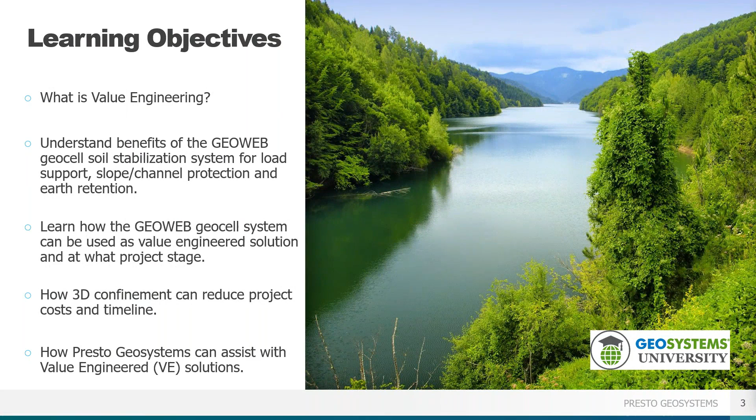A good starting point is defining value engineering. So there are many interpretations, basically commonly understood as the balance between function and cost. So trying to improve the value by either enhancing performance or reducing cost. However, it's often mistaken, especially as a manufacturer now, as cutting costs. So in reality, value engineering should focus on maximizing value along with quality, not just minimizing costs. So it involves exploring alternative materials and methods to achieve the design's intent without compromising performance. Since cost and functionality are directly related, reducing cost at the expense of performance ultimately lowers the value.

So all the project requirements must be clearly defined before proposing alternatives. So the objective is not just to meet that design intent at the lowest practical cost, but also including life cycle costs, maintenance, to improve its functionality and quality. So when can it take place? During any phase of the project. They all have pros and cons. The planning and design phase, that's probably the best part, as we all know, because addressing it right up front, you're going to have less cost. The change is lower, the impact on the schedule is minimal. However, most of the time on projects, value engineering typically occurs after the bidding phase, at the beginning, or actually even sometimes during construction.

Engineers perform their due diligence. They do all the planning, all the estimating, all the design phase, but especially what's happening around the world now, external factors often necessitate value engineering after the bid. Construction costs are rising almost daily, so it's common for the project cost estimates that the engineer made to come in much higher at the time of bidding. So this makes value engineering essential to keep the project within budget and moving forward.

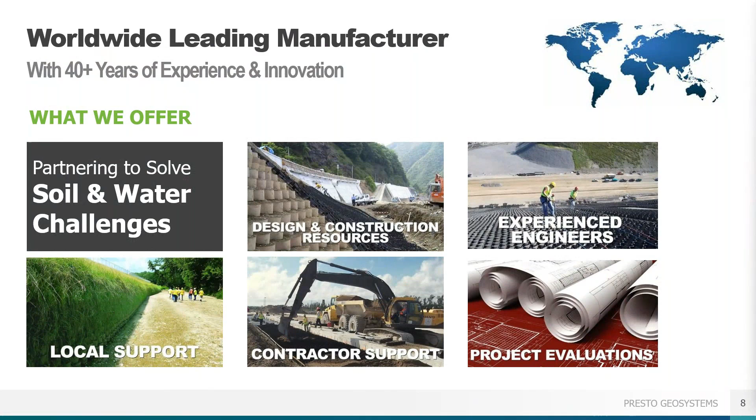So let's begin with just a little brief discussion on GEOWEB geocells. So at Presto we worked with the Army Corps of Engineers back in the late 70s to develop the technology. We really have been at the forefront ever since. We do provide more than just product. Like I just mentioned, we'll work with you from concept phase right through construction. So we have a great distribution network, and we operate in 4 different areas: load support, slope protection up to about 70 degrees. We can do channels, aggregate filled channels, vegetated channels, concrete filled channels. We also do reinforced slopes, gravity walls, and reinforced walls, MSE walls.

We also offer porous pavements, a vegetated geoblock, aggregate geopave. And also we have some construction mats called geoterra. But today we're going to basically focus on the 4 applications I showed here.

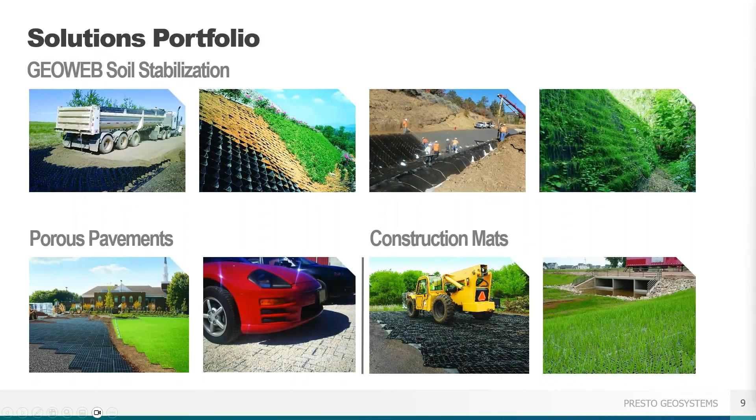So the system consists really of 2 main attributes. The first is the cell diameter, or the size of the cell. It comes in 3 different cell diameters: 8.5, 10.5, and 18 inches. So depending on the size, through that free evaluation, we'll make sure we have the correct size, and the cell depth comes in these different cell depths.

It also comes in different section lengths, more appropriately to fit if you have, say, a slope project that's only a certain length. We can match the most, basically limit the waste. And if it's larger projects, we can custom make panels to a specific length also.

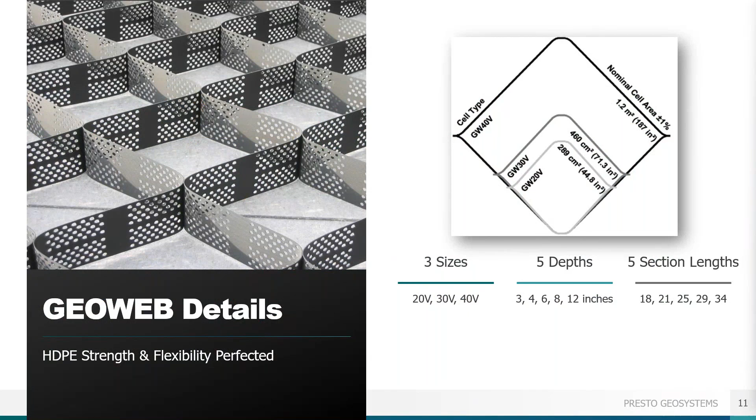The second attribute is a welded seam, where basically all the internal junctions are important. That's the most important function of a geocell. The stronger the seam strength, the better performance, period. So a strong seam will always make sure your lifetime performance is met.

We use 100% virgin high density polyethylene resin for consistent strong welds at the seams. You want to make sure you're staying away from any products that add cheap fillers or alloys, basically to lower the cost of the product but affects the seam strength.

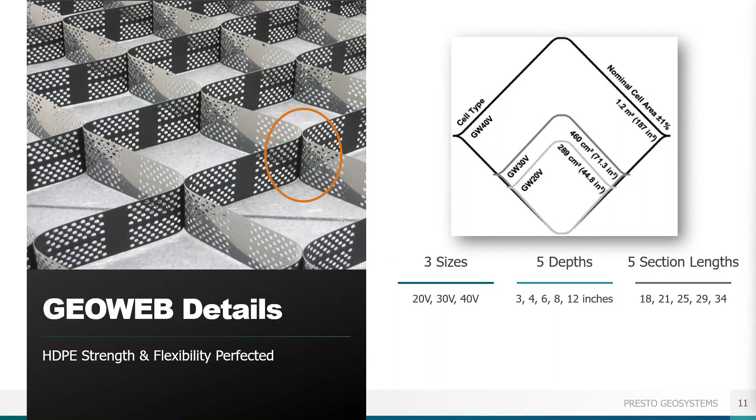The second characteristic is the infill material. There's basically 4 different types of infill. We can use coarse sand. We actually invented this GEOWEB technology for the Army Corps of Engineers. It's actually called sand grid. So the intent was to use it for beach sand that gives access to heavy military vehicles. So we can use coarse sand or anything that's a drainable sand.

We can do topsoil and vegetate it. We can do aggregate, and I'll show you some testing we did. And also we can fill it with concrete for channels, for applications, retaining walls in the front face.

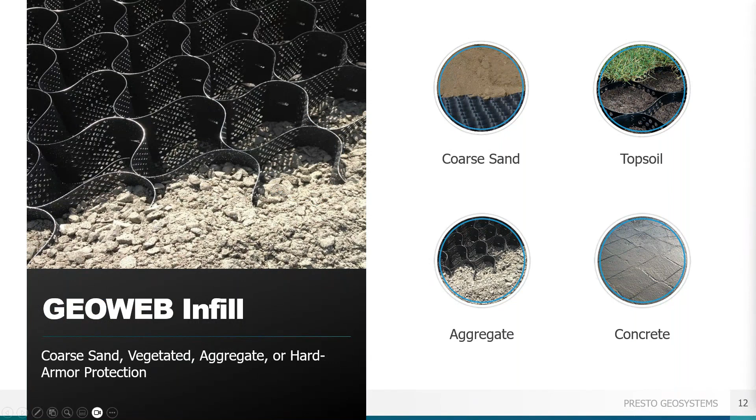Here you can just see a typical GEOWEB panel. It comes tri-folded on a pallet, each one a nominal about 8.5 foot width, and different section lengths. As I mentioned in the previous slide, we can do different section lengths or custom to meet your specific project. It ships about 100,000+ square feet on a truck, so it ships very efficiently.

All of our GEOWEB, all of our accessories are 100% made in the U.S. under very strict QA/QC processes. We comply with the requirements of BABA, the Build America, Buy America, Infrastructure Investment and Jobs Act. So if you have a project with that, we can provide the necessary documentation that shows that we meet all those requirements.

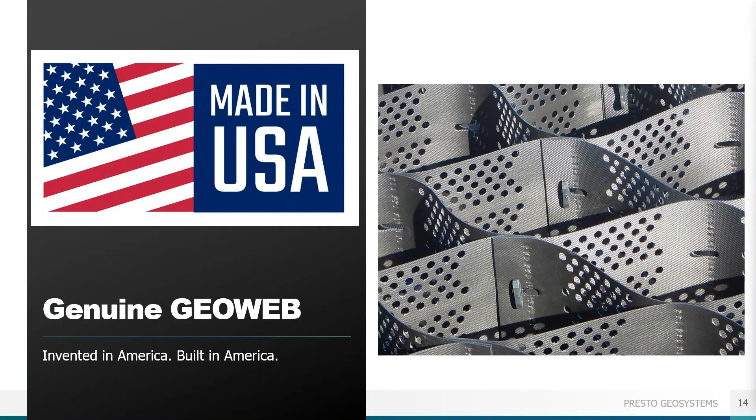So the system components, those are all the supporting components that really help protect the surface. You can see we have all different types of accessories, whether it's used for slope protection, where we have stakes, our actual wall keys for wall projects, tendon clips for slope protection. These are all designed specifically for use with GEOWEB. We don't use any other outside materials. All these are engineered specifically for use with GEOWEB.

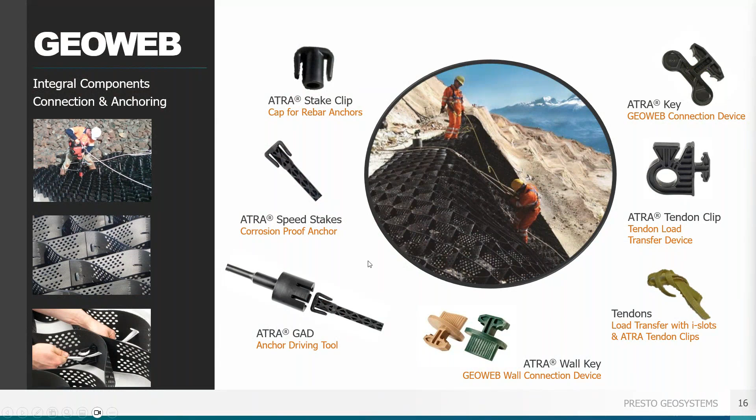Here you can see the ATRA key. This is probably the most important feature and accessory that we have. It's specifically designed to connect the panels side to side and end to end. You want to make sure that you're not getting any separation over time, which might happen with, say, zip ties or metal staples. We recently upgraded. We added these frictional barbs on the bottom of the key, basically to enhance the lockup a little bit. But you want to make sure that these panels do not separate when you're putting it in.

So that's what the ATRA key really provides, and it protects against the 3 primary modes of mechanical junction failure, which are shear, splitting, and peeling. And in our calculations, we check the factors of safety of those to make sure that there's no issues with any of those failure modes.

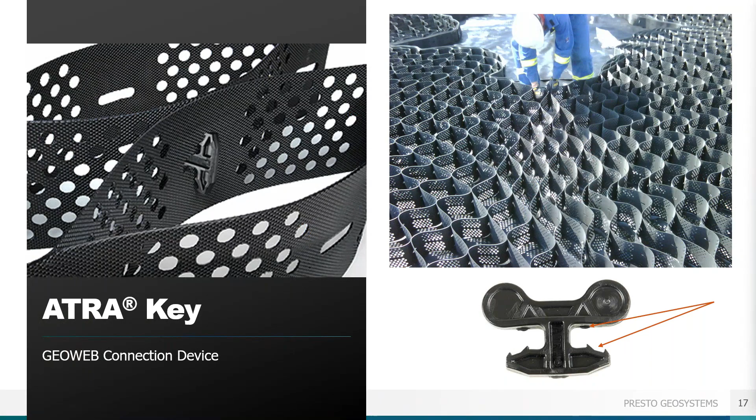So I'll talk about the 4 different applications now. The first one is load support for both paved and unpaved roads. This is a project we did. It was about a 1.5 mile road to an Entergy substation. This was an area south of Baton Rouge. A lot of rains, a lot of swamp areas.

The initial design included about a 16-inch cross section with a couple layers of grid and a subgrade low CBR value of 1. But when they went to put it in, the subgrade was just too weak, and with the heavy rains, the portion of the grid started to fail.

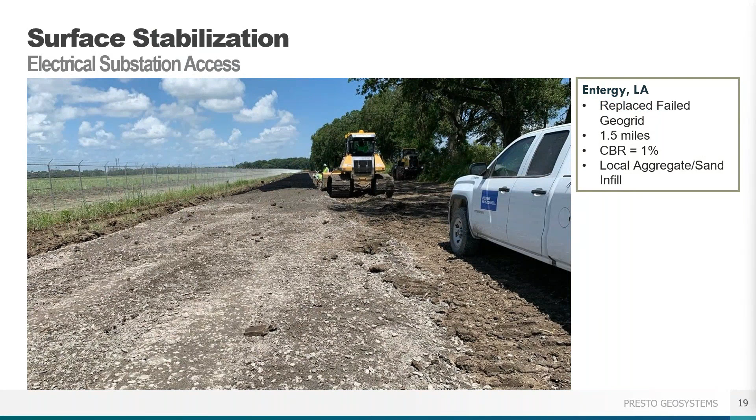So we do a lot of work with this engineer. They called us up, and we actually did a value engineered solution for them. So we worked with the engineer. We came up with a cross section consisting of an enhanced woven geotextile. These are geotextiles that can actually drain but keep the fines underneath.

This one right here had about 4,800 pounds per foot of reinforcement, so a very strong geotextile. Here we had a 6-inch GEOWEB. It was actually filled with the local available sandy crushed aggregate. So we don't need to have that high quality aggregate. We can use the sandy material. We're really going to save you costs and save you time.

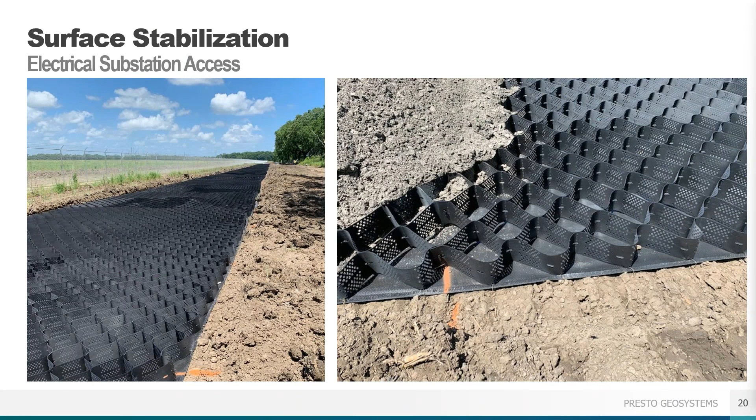This one, I think we reduced the aggregate by about 6,000 yards. You can imagine, cutting that cross section down to about 8 inches, or cutting it in half, really saving a significant amount of money, but also allowed them to build the road on time and on schedule. Here you can see the panels are very flexible. They can do inside or outside curves. You basically just under or over expand them.

You can see the final road construction. You can see the quality. It's not a very high quality aggregate at all. You can see the sand portions in that, but like I said, this has been in service for a couple of years now, and they've had really no issues on it. So that's the kind of application we do a lot for unpaved roads: low subgrade CBRs, 2, 3, less than 3, really bad soils. That's where we can really shine.

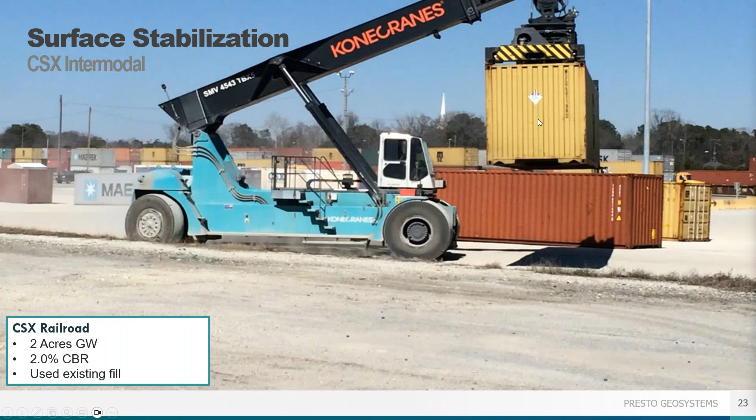This is an intermodal yard we did for CSX. It's out in South Carolina. You can see the picture. There's a heavy reach stacker, about 60 tons. It was severely rutting this area. You can see the rutting here, so you get a little better close up. It's basically the tire, but they had graders on this thing a lot. Every time they hauled one of the containers, they'd be rutting this. So it was really costing them time in maintenance, a lot of costs, a lot of slowdowns.

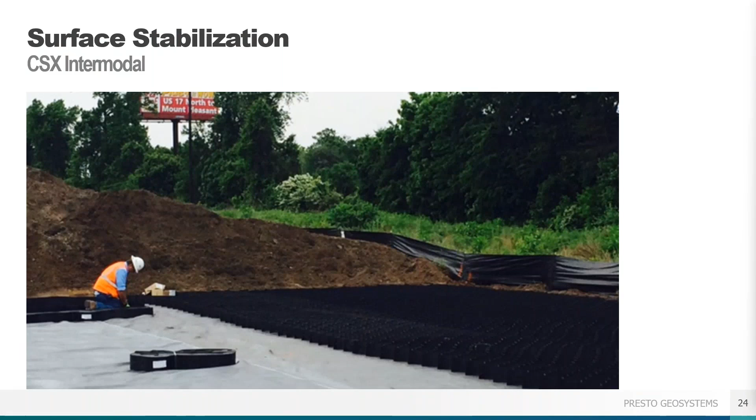They contacted us. We do a lot of work with them on the rail. So we worked with the engineer and the geotech on this one, and it was basically the same type of solution as that last project. We once again used an enhanced woven geotextile, a little stronger on this one. We still used the 6-inch GEOWEB. But the interesting part of this project is that during the review stage with the engineer and the geotech, it was determined that we could reuse the soil since the fines were less than about 10 to 11%. Usually if it's less than 15%, we can use it to fill the GEOWEB. So rule of thumb, if you have 15% fines or less, that's a really good infill for GEOWEB.

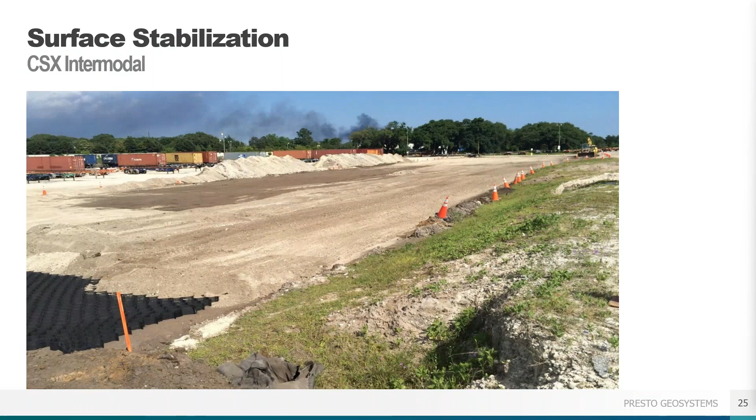So what we did is we just stockpiled it all on the site here, and we put it right back into the GEOWEB and used it as the infill material. Saved them over about 3,000 yards of hauling the bad stuff out and hauling the good stuff back in, plus the downtime, so it really saved them a significant amount of money. And you can see the final solution, a low-grade sandy aggregate. This has held up. They maintain it maybe once a month, if that. Sometimes after heavy rains, because there are fines here, they'll have to go in and grade it, but they don't have to do it daily like they were doing.

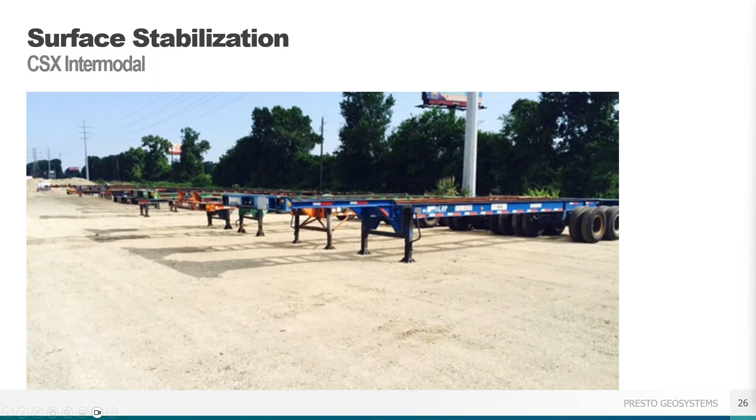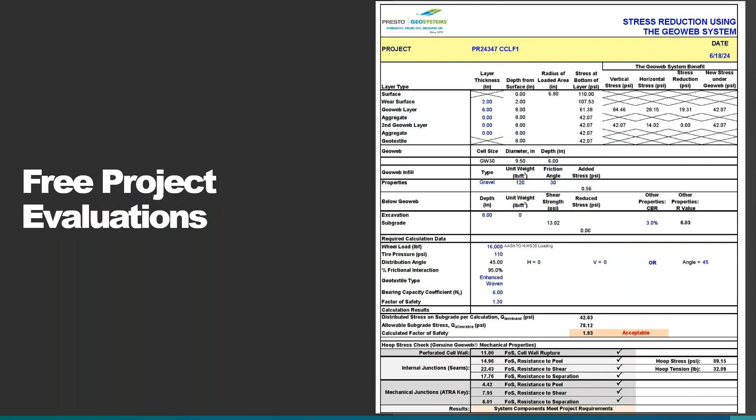For all of our projects, we'll give you calculations for unpaved roads. Like I said, we're going to give you a written summary, the calculations, cross sections, a plan view if necessary. It's free of charge, no matter what the size, we're still going to provide the same amount of support. It's based on tire pressures, it's based on the load, whether we're having geotextiles underneath it. And like I mentioned before, we're going to check the mechanical junctions for factors of safety for peel, shear, and separation, but also the internal junctions.

So the seams, the welds, we want to make sure that's a very high factor of safety, because that's your main failure point in any geocell. It's not the walls, it's the seams. The seam could pull apart. So we want to make sure those are very high factors of safety. We can also look at your project as far as the number of passes.

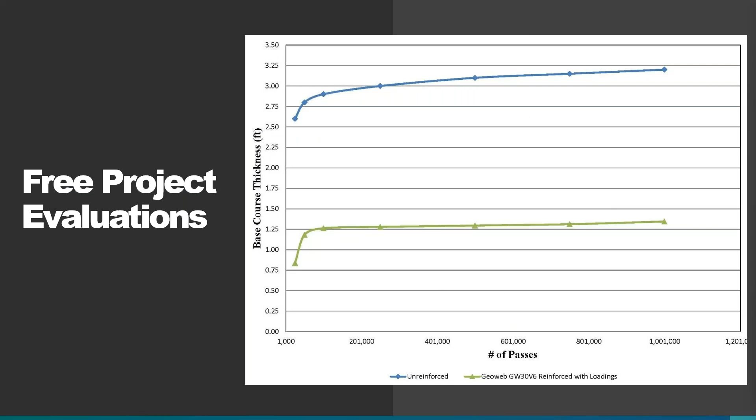So we use the modified version of the Giroud-Han formula for that, where we can look at your unreinforced section without, say, GEOWEB and geosynthetics, or with it. So we can show you how we got to decrease the cross section depth based on the number of passes. I have this chart, and it's a pretty well accepted chart in the whole geosynthetic industry.

A lot of times you don't have the money to do a full soil report or soils investigation. So I have this chart available by email. I also have it laminated, so if you're interested, we can get you a copy. But basically, I get a lot of calls every day: hey, I got a really bad site, but I don't have any soil boring or any DCPs or blow counts or anything like that, but I'm walking it and I'm sinking, say, 2 to 3 inches.

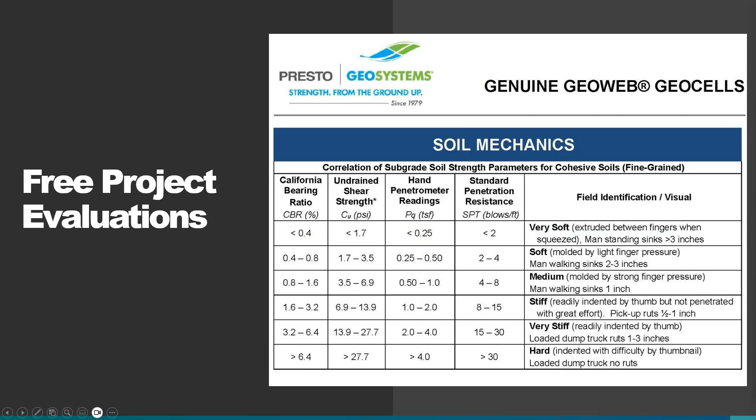Then I can correlate that from a field ID to an assumed CBR and shear strength to be able to go ahead and design an acceptable cross section. And I would say about 50% of the time we don't have any soils information. With this chart we're going to be a little bit more conservative, but like I said, sometimes you don't have the time or the money to go ahead and do a very expensive geotech report. So if you're interested, I have a copy.

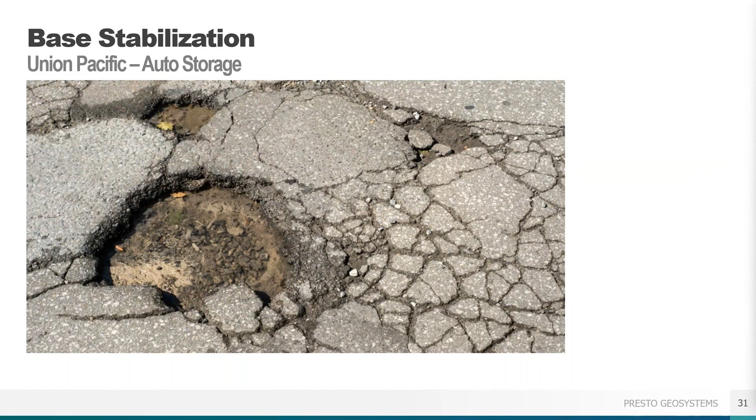So now we're talking about some paved roads. This was a Union Pacific project out in the Bay Area. They're doing a big intermodal yard expansion, and the original design was basically some grids and some high quality aggregate. They got out there, and this is what they ran into: bay mud. Very, very low subgrade strength. And as that high water tide would come up, it would just flood this site. So they were having a ton of problems getting proof rolling and everything like that.

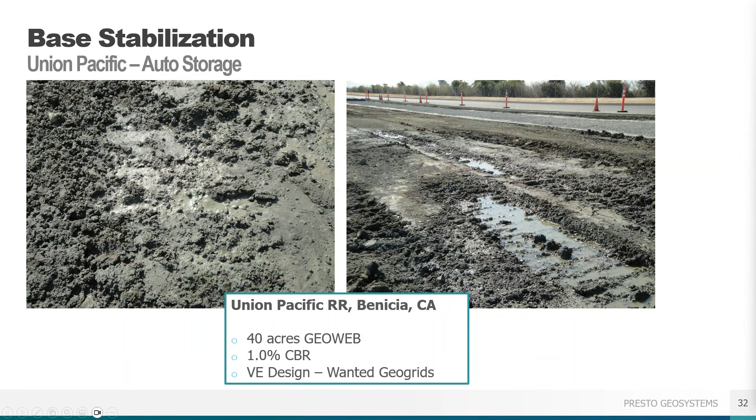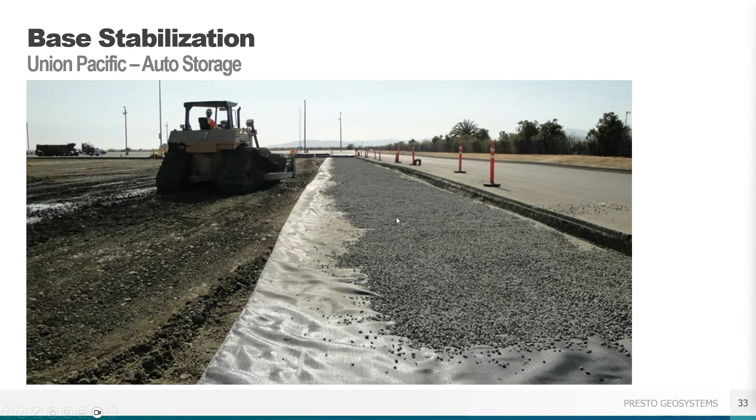So they came to us, and we did a lot of work with them, engineer and contractor. We did a value engineering solution. For that one, we used once again that high strength enhanced woven geosynthetic. We rolled that down; this one was about 4,800 pounds per foot. We also included a 6-inch open graded base layer beneath the web, to allow the water to freely flow underneath the pavement. As that tide would come up, the water is free flowing in that area. And we used that same material to infill the GEOWEB.

So staging is very important. We want to make sure that the contractor is all ready to go into the site. We typically do Teams meetings at least a couple of weeks before construction to answer any questions, so you have all the tips and tricks to install it very efficiently and very quickly. Each panel, this one about 270 square feet, goes down very big, very fast. Install rates of over 3,000 square feet an hour with typically 2 to 3 guys. Usually we're way out ahead installing the GEOWEB versus installing the infill.

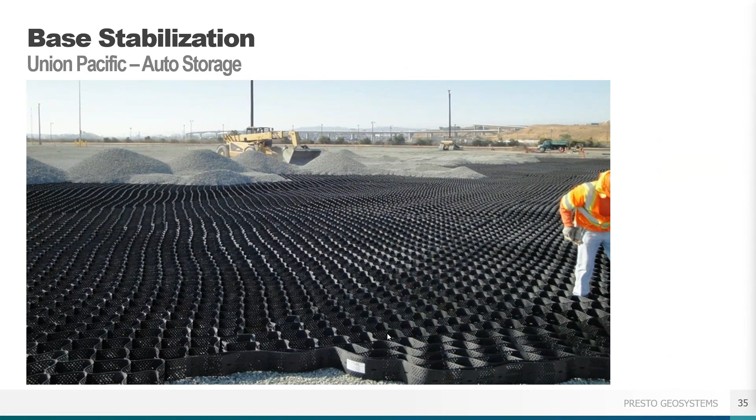Here you can see the grader pushing that open graded type material. I think they kept it about 5 to 7% fines, basically just infilling that GEOWEB. The GEOWEB cells themselves provide the confinement, so you don't need fines for confinement and stabilization. And you don't need any special asphalt equipment. You're basically just going to compact that final surface and run the typical asphalt machine and roller on top of it. This was a 4-inch asphalt surface over the top of the GEOWEB system.

But once again, the value engineering solution was the main driver in this. We've done, I think, 5 different expansions on this port over going on probably 12 years now. So we're well over probably 60 acres already. So a very successful project.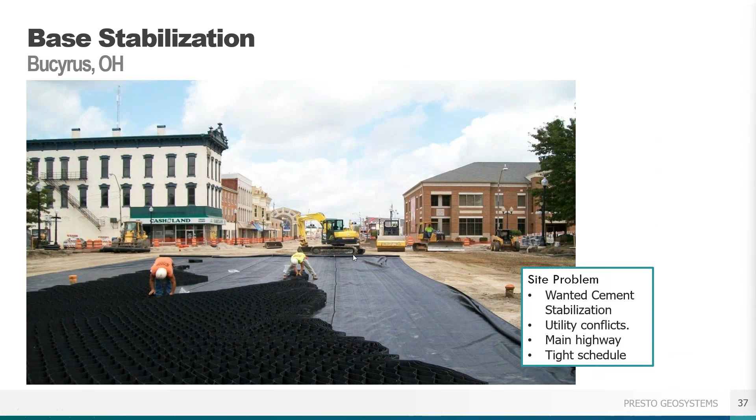So this is about 250,000 square feet in this small town. And they came to us, like I said, when they encountered those conflicts. So we worked with them, came up with a system, once again, with a high strength woven geotextile, 6 inches of GEOWEB. They put a 2-inch surface over the top of it, and then 9 inches of asphalt.

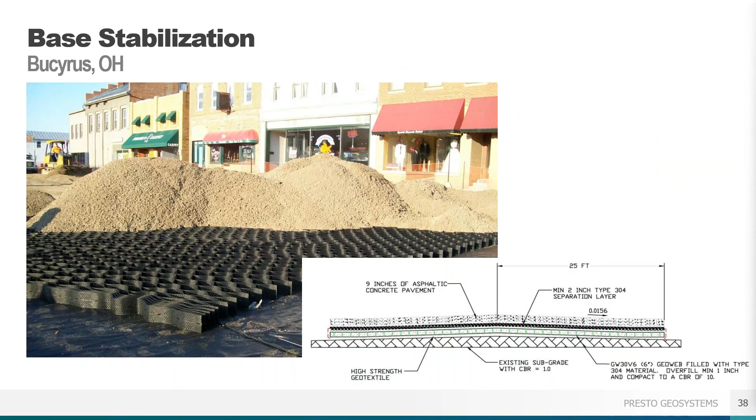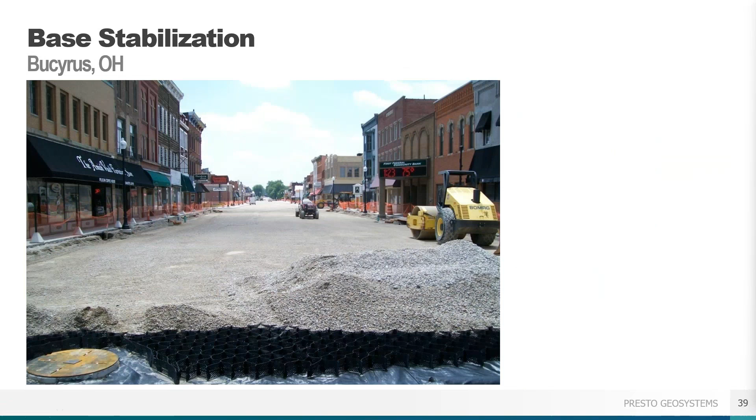So here you can see one of the great benefits of GEOWEB, because this project also wanted to use cement stabilization. So if they put down the lime stabilization and had any wet weather, they had to wait for it to cure. So this would have been also a delay. So with the GEOWEB, once it's infilled, you've got basically a working surface. You don't have to wait for any cement stabilization or lime stabilization to harden up.

And you can actually asphalt right behind it. You can see here, there's asphalting right on top of that GEOWEB system, and they're still going to roll this one out and put the GEOWEB down, but they're asphalting right away.

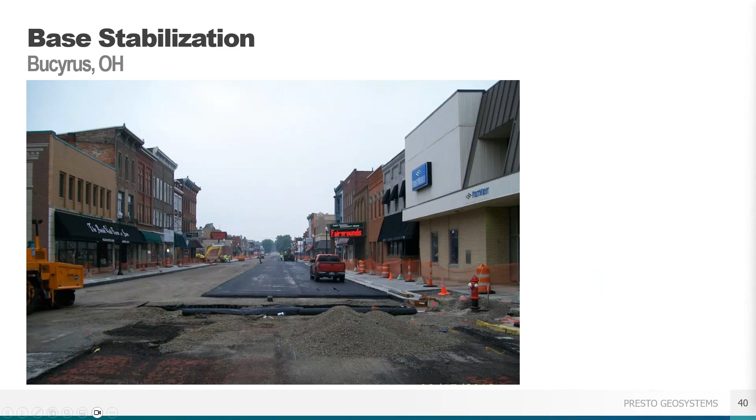For these type of hard surface pavements, whether it's concrete or asphalt, we follow the AASHTO method. We'll work with you. Like all other geosynthetics, we use improvement factors to layer coefficients based on research and testing. So once we get a design structural number based on the number of passes, the type of road it is, the subgrade CBR and the serviceability, we can go ahead and design that road very quickly, very efficiently. We can show you how it compares to a traditional solution too, so you can actually calculate how much money you'd be saving.

So in summary, we'll work with you on any type of load support application, whether it's under a final surface, asphalt or concrete, or an unpaved road. Like I said, very flexible in type of infill. We can use low quality sandy aggregates. We can use open graded material. Like this project, you can see up close. This is 100% open graded, where they want to get a lot of water flowing through this.

We'll help you. We'll provide that full, complete solution, with the type of geotextile, if you need a sub-base, type of geocell, type and depth. We'll provide all of that free of charge. Usually, if it's not a very complex problem, within one or 2 days we can get that full evaluation back to you.

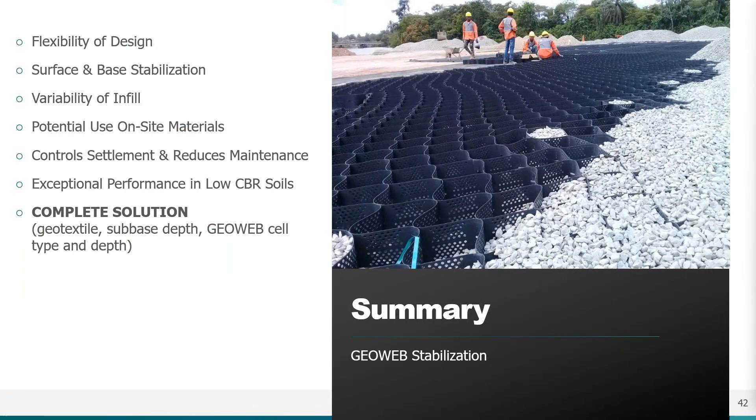So a little bit on some slope and channel applications. We've done a significant amount of testing at the Colorado State Hydraulics Lab out in Fort Collins under the direction of Dr. Chris Thornton. We looked at indoor and outdoor testing. We've done it for vegetated, aggregate and concrete fills.

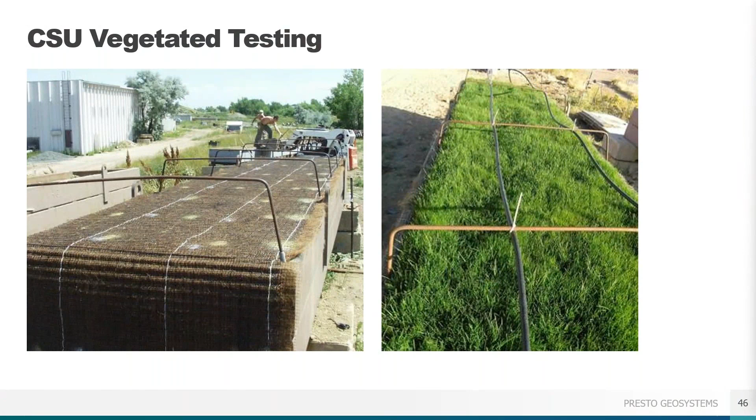So the first one I want to talk about is vegetated. So here you can see we just want to simulate a typical installation. We used a 6-inch deep GEOWEB panel, filled it with topsoil. This was a NAG C350 TRM over the top of it. What we're trying to do here is to see how much GEOWEB improves the performance of a vegetated surface, whether ECB or TRM. So we did a total of 10 1-hour tests in the outside flume.

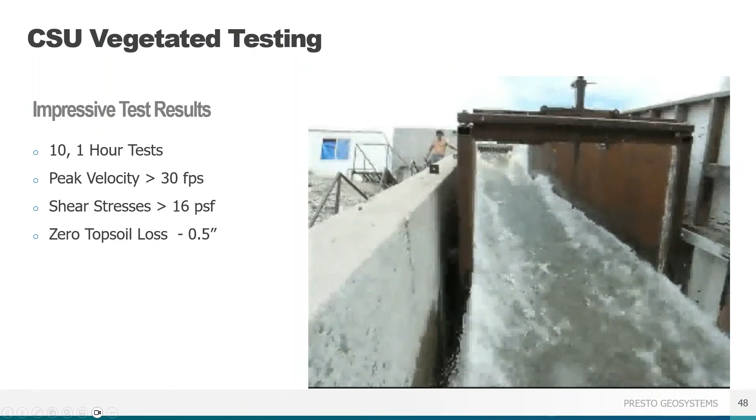And here you can see the performance. So here we did 10 tests, 1 hour. We had peak velocities over 30, shear stresses of 16 PSF, and 0 topsoil loss. Look at how fast the water is going down. We had some significant velocity, but those test results showed, here you can see a GEOWEB with a TRM. Here's shear in blue and velocity in red.

You can see compared to a 12-inch riprap, we can more than double the performance of a 12-inch riprap system using a GEOWEB and a TRM, because that GEOWEB confines the roots once it's established. It really prevents any topsoil loss. Once again, here's the TRM alone. And we went from 15 without the GEOWEB to double the performance. So a significant amount of improvement.

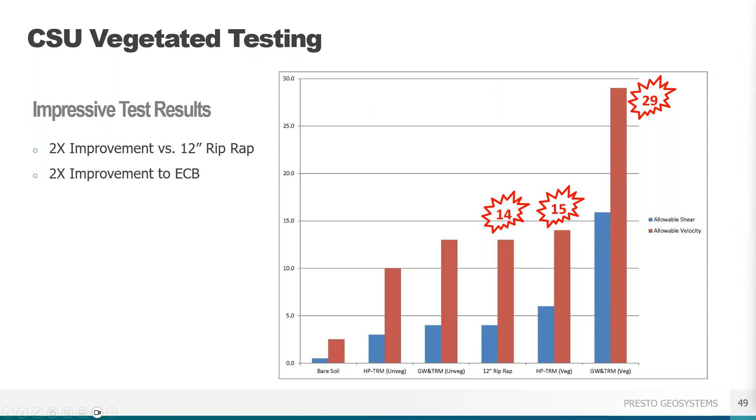Let's go through a couple of projects for vegetated. This is a slope project we did. This is down on the Pan American Highway in Peru. You can see the significant slopes. They get a lot of water that runs down these channels here. So basically this is an old mine site, mine reclamation, where we had to provide these steep, 4 to 8-meter high terraces.

They're up to about 75 degrees. You can see how steep they are as they're installing the GEOWEB. So what we're doing is we're trying to keep that water and the vegetation loss. We did put some here too, just to get a little riprap to slow down the water that's flowing down the channel. You can see how steep those channels are.

Just like hanging a set of drapes on these steep channels, you have polyester, polypropylene, or sometimes even Kevlar tendons that run down through the panels. We have a pipe deadman buried at the crest of the slope, and we have those ATRA tendon clips that tie into the tendon in the GEOWEB. Basically, just to transfer the weight from the panel up to the top of the slope.

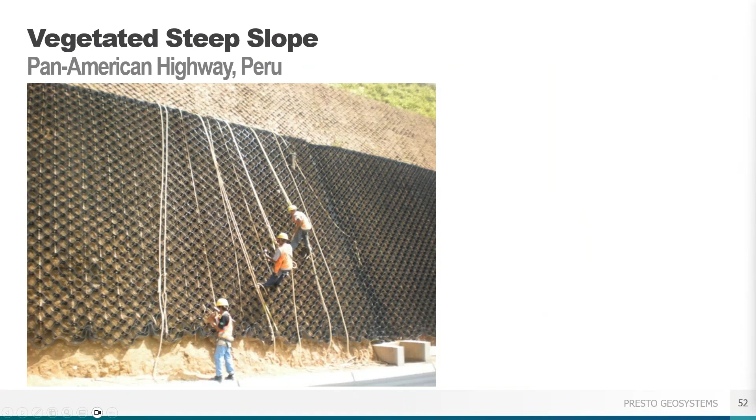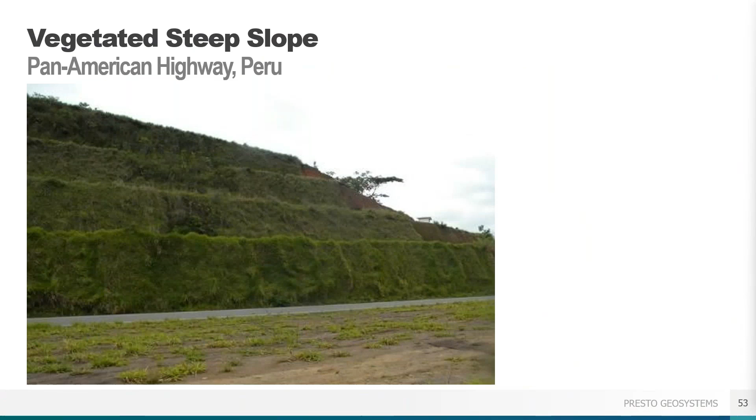And here you can see the final project. This was taken about 1.5 years after the GEOWEB was installed. So you can see a significant strength and lots of vegetation. I just love this project.

This is out in Las Vegas, north of the Strip. There's a pretty nice subdivision right here on the left side of the slide. Vegas doesn't get a lot of rain, a lot of precipitation, but when it does, it usually comes down pretty intense. It can last for a long time. You can see there's a lot of erosion in this area. The city and one of the engineers wanted to basically improve this. Everything they tried just got scoured away.

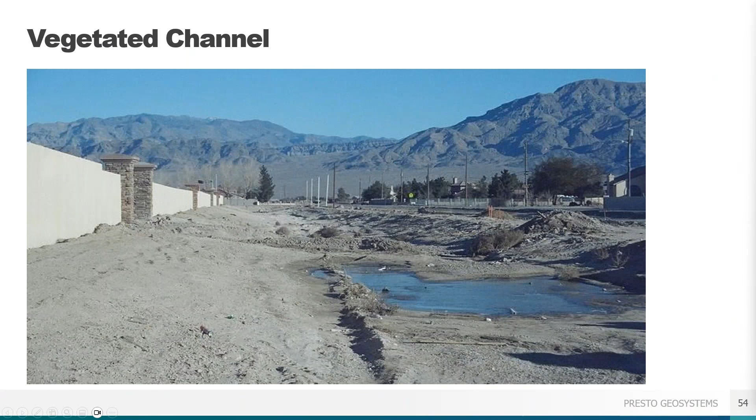They were looking at maybe using some gabion baskets, but when the homeowners saw what they looked like in the subdivision, they weren't too interested. They contacted us to do a value engineered solution. Here you can see what we did. We used GEOWEB filled with topsoil, put down erosion control blankets, and hydroseeded. We turned this area basically into a park.

So, like I said, this area will get water. A significant amount of water runs down this small little channel right here, but GEOWEB is strong enough to hold it in place along with the erosion control blanket.

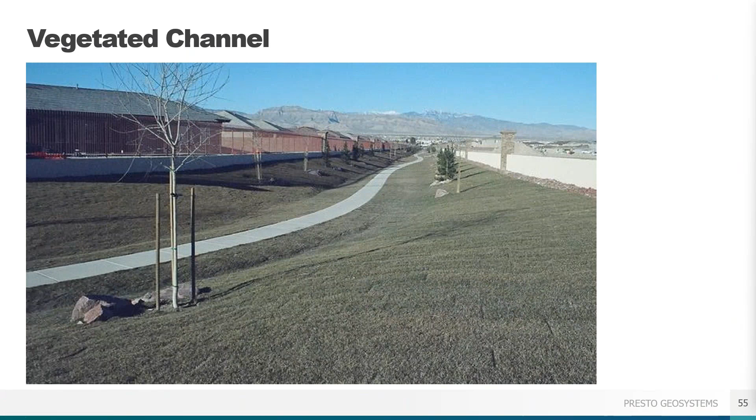So, next application, I want to talk about aggregate infill. We did two different types of testing on this one. We did an inside flume. We tested the different cell sizes, the 20, 30, and 40V. We changed the slopes a little bit. We also changed the rock size. The main intent of this testing was to develop a riprap reduction calculation. So if it's confined in GEOWEB, how much can we reduce the riprap, to what size?

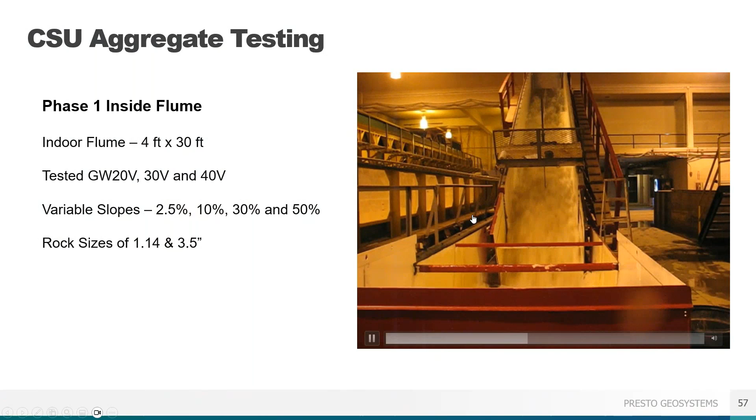So we ran the tests inside. You can see, once again, there were our tests. After the testing, they would look at the rock loss under different velocities. We sort of maxed out that testing. So we went to the outdoor flume and ran more testing.

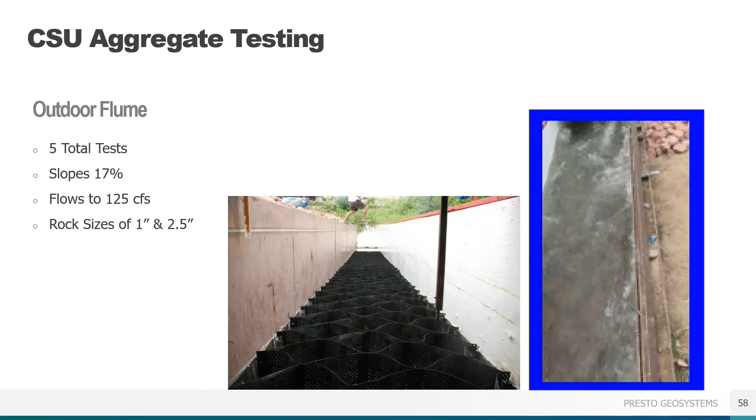We had 5 tests and a fixed slope of 17%. And we varied that flow up to about 125 CFS. And, once again, we changed the rock size a little bit. Like I said, our whole intent was to develop that riprap reduction. If you look closely here, you can actually see the water flowing over the rock-filled GEOWEB. So basically, the confinement prevents the scour out of the GEOWEB.

So max velocities over 18, shears up to 16, but we can reduce the rock size up to a factor of 10, depending on what your bed slope is and your flow rate. We're seeing it all over. Riprap is getting very expensive. It's hard to transport. It's hard to work with.

So if you have a project, even small projects like bridge scuppers, things where you've got to place 12-inch riprap, we can typically do it with a 1-inch rock inside of a GEOWEB. So if you have any projects like that, we'd be more than happy to help you.

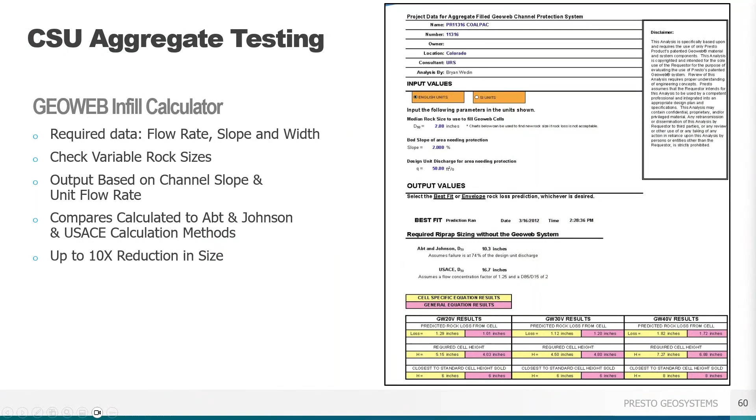But here's our model we came up with. So basically all I need is the bed slope here, the flow rate, and the width of the channel, and I can evaluate that very quickly and give you some different options. We can look at different bed slopes, different flow rates.

So here's a project we did out in Gila River, south of Phoenix. They don't get a lot of rain in Phoenix either. When they get it, same as Vegas, it comes down hard, and it was leading to a lot of problems along this 1-mile stretch of this channel. The channel was actually used as a way for people, the indigenous members, to go through this area.

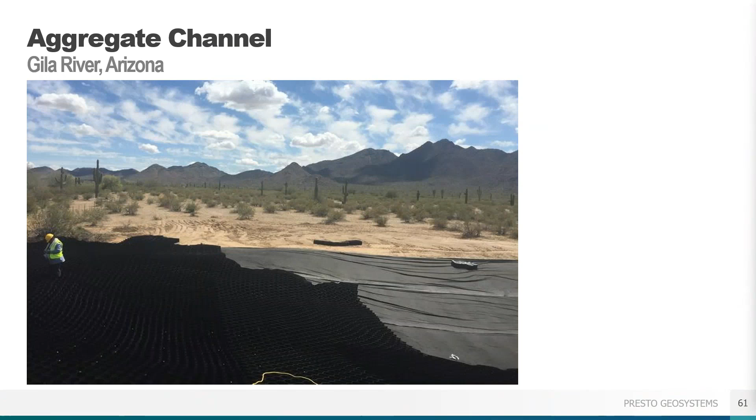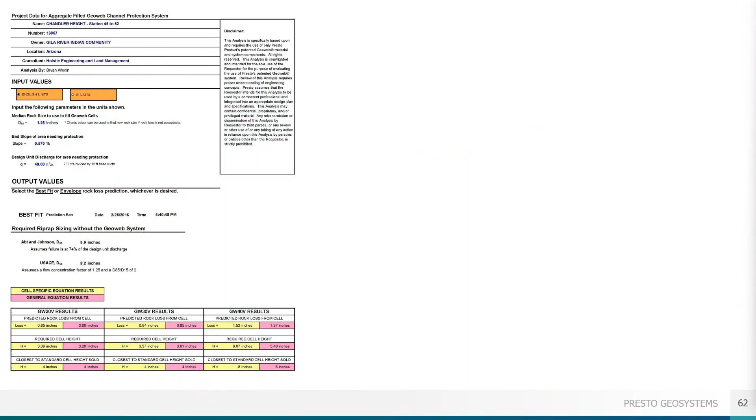So they needed something that they could use as a channel, and also something that could use as an access area. So we worked with the engineer to come up with different types. We ran the rock loss calculation for many types of different flow rates, different bed slopes, and we kept running. We came up with all these different solutions here. You see we had different station numbers.

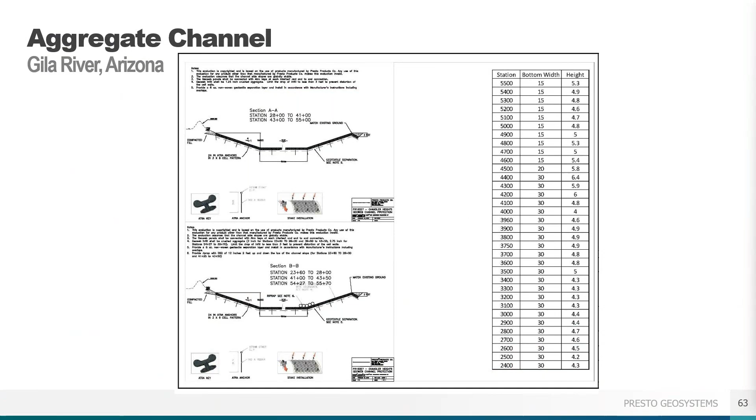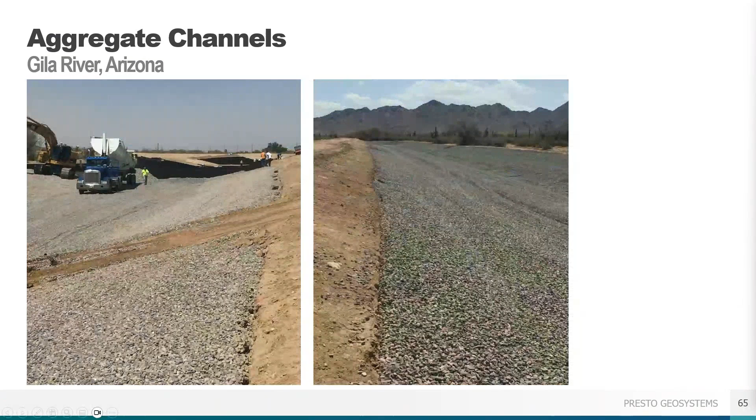And you can see they're even using it as a fill. So once the geo is filled in, you're basically using it as a haul road for the trucks. So it's actually acting as a channel and also a load support. There are many ways to fill the panel. This one, you can just dump it, use an excavator. A lot of projects recently are using rock slingers, very easy way to go. It goes pretty fast. So we can work with you on that.

Concrete surface. The last part of it is a concrete surface. So once again, we went out to Colorado State. We did the testing. This one was a 3-inch GEOWEB. We had a fixed slope of 2 to 1. On this one, we reached velocities over 36 feet per second, shears over 21. The issue with this one is that we maxed the flume out. And at that time, we're the only geosynthetic to ever max the flume out at Colorado State University.

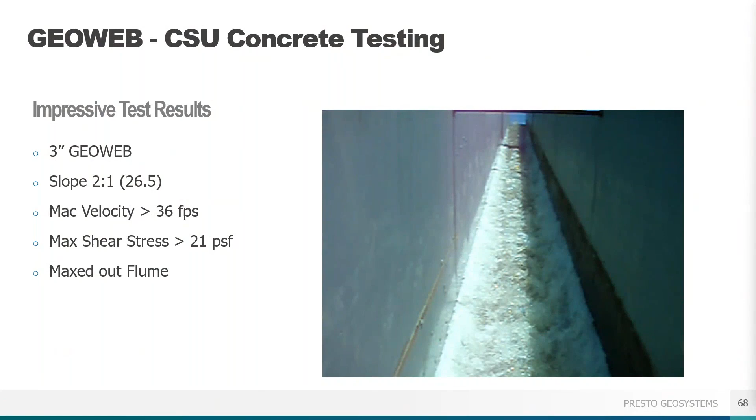So we do a lot of concrete channels, a lot of concrete bridge abutments. The good thing about concrete filled GEOWEB is the cells act as the reinforcement and also the formwork. So you can completely eliminate all that portion of your work. A lot of projects we work on are wage rate projects. If you can eliminate the cost of the formwork and the rebar placement and tying, that's a significant benefit and savings to your project.

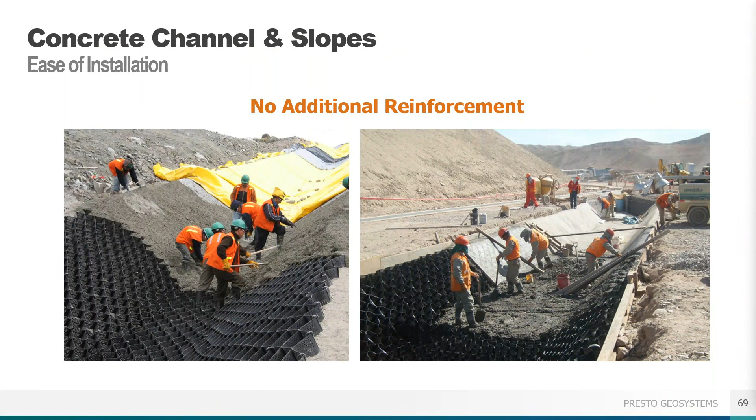And this is extremely strong as far as pull-out strength. We've tested it. It's extremely strong. If you're interested, I got some of that information. This is a very interesting project we did. This was for one of the same engineers on a port project. This was a project down in Texas. The original design was for a 6-inch concrete channel here and 4-inch grout bags on these slopes here. This is a significant size, 1.5 million square feet of GEOWEB.

But the problem is the bids came in and they were significantly over cost because of all the cost and time to install not only the grout bags, but also the time to install and tie all the rebar and all the formwork for this channel that basically went around this whole intermodal area. So they called us. We worked with them on a VE solution and different alternatives. We ended up with a 4-inch GEOWEB in the channel and a 3-inch GEOWEB on the slopes.

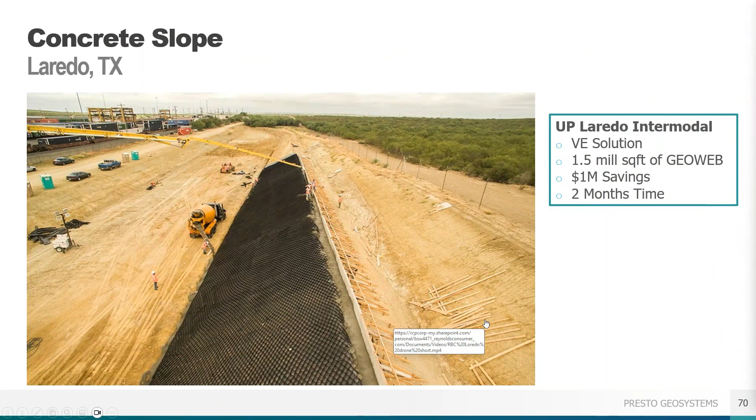We cut the amount of concrete down a couple inches in the channel and 1 inch on the slopes. That's saving a lot of money. But also more importantly to the railroad here, for them, time is money. So we actually saved a couple months of getting this intermodal yard up and into operation. So we saved a significant amount of that.

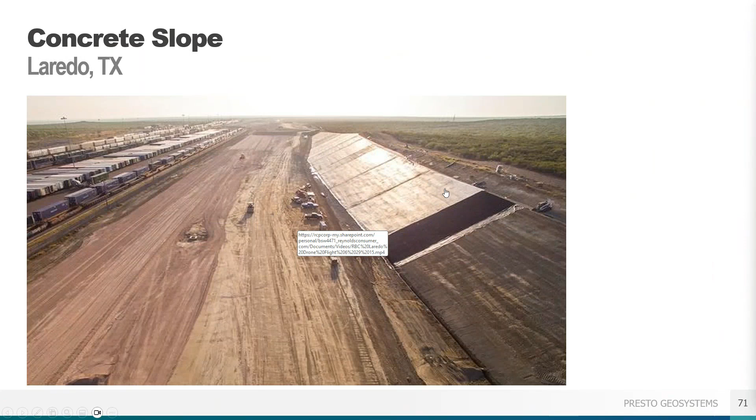Here you can see the extent of the sections being filled. Here you can see no problems with joints. You see it stop and you can keep pouring. See that before they started the concrete channel up above. You can see just an up close picture of that.

And actually, when they install this, you basically just screed it right to the top of the panel. You don't want to do any overfilling because that's not reinforced, so it's going to crack. So you are going to see a little bit of the GEOWEB cells sometimes because that provides the reinforcement.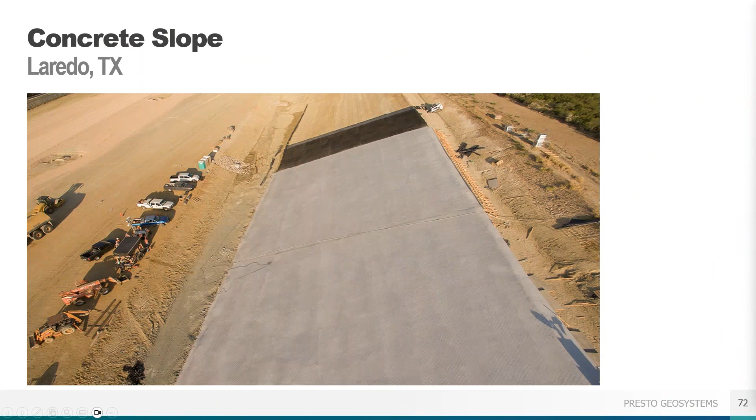And here you can just see the channels that go all the way around this yard. You can see the GEOWEB before it's placed. Once again, 3-inch GEOWEB on the slopes, 4-inch GEOWEB in the channels, going all the way around. Here you can see it's very flexible. The panels before they're filled don't have any strength because it's just plastic, so it's easy to cut around any type of pipe penetrations.

This one, of course, is just concrete coming into that channel. You can see we did put down a non-woven geotextile. When we do any concrete GEOWEB, we want to make sure that pore pressure doesn't build up underneath it, because water can fail any concrete. It's almost impossible to stop pore pressure buildup.

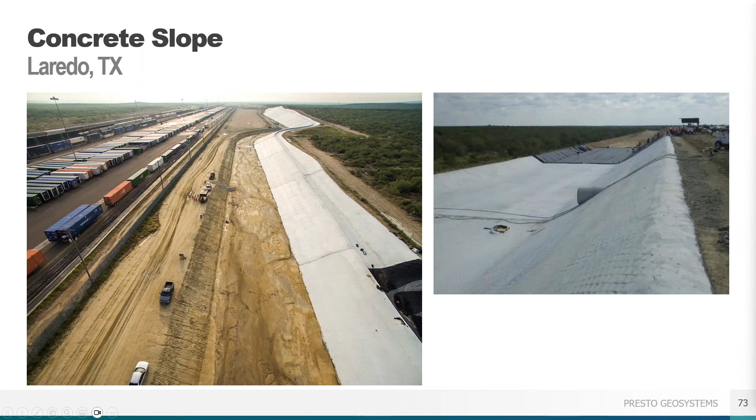So we've got to account for it, whether that's with weep holes spaced across the surface. We've also used pressure relief valves in channels and tanks, where we allow the water to basically flow up into the channel so it doesn't build up pore pressure. So we'll also work with you on that portion of it too.

We do a lot of concrete channels, the same philosophy as that last one. We do a lot of channels for the Bureau of Reclamation. These are all drainage channels out in Colorado getting the water down. We wouldn't want to lose the water. So they want something fast and easy that they can use on any type of surface or any type of slope. So what they've basically settled on is we put down a textured liner, 4-inch GEOWEB or 6-inch GEOWEB, depending on the slope angles.

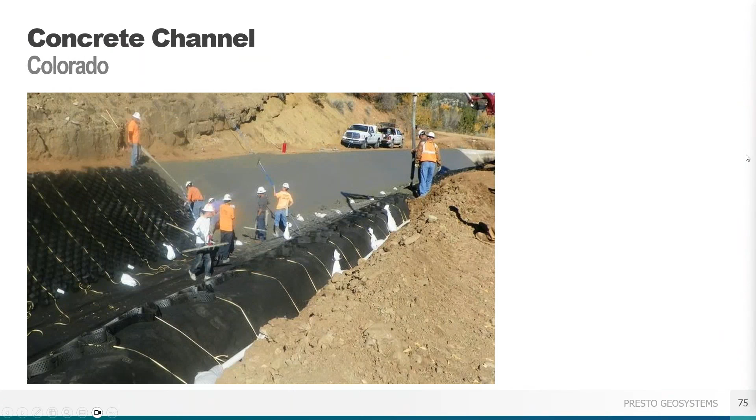And this is the final channel. Like I said, you can see some of that. We build miles and miles of these for the Bureau of Reclamation out in Colorado. We use the testing based on Colorado State to make sure of the velocities, but these velocities never really get that high.

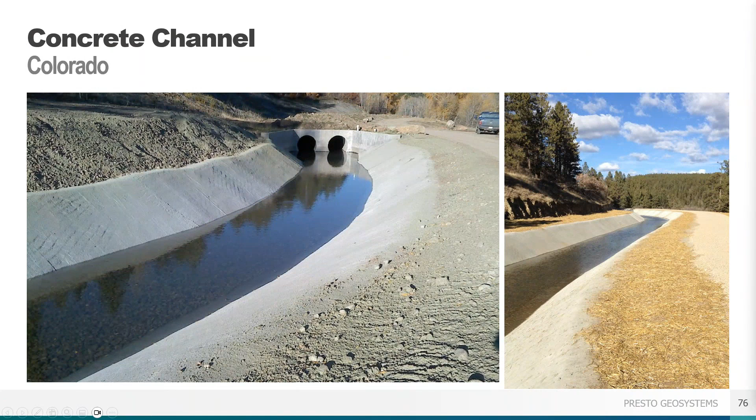If you do have really high velocities, we can actually design in some baffles to slow the water down. We call them energy dissipation baffles. If you have an area where, say, a channel comes to an end at a higher velocity, you don't want to transfer that scour from a channel to an open area. We can design in some energy dissipators here to really slow it down so that when it gets off the channel, it's not going to cause high scour. So we can also help you on that.

So in summary, again, it's very flexible for slopes and channels. We can fill it with topsoil, aggregate, concrete. It's all backed by research we did at Colorado State. Any type of challenging application, we've seen them all, from mine sites with 45-degree slopes where we had to add energy dissipation, to really challenging projects. So we'll give you a complete solution with anchors, tendons, plans, cross sections.

If you need a geotextile, we can also provide that. We have one- to two-page research summaries, independent from CSU, so we can give you the limitations of the system and the advantages too.

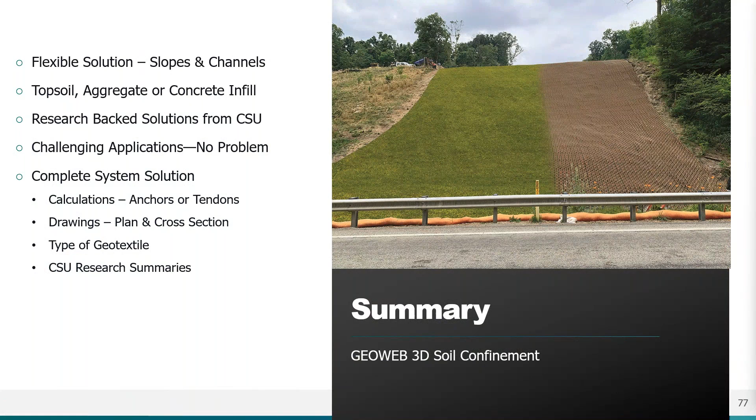So next I want to talk about earth stabilization. We can actually do a bunch of different types. We can do reinforced slopes. We can do gravity walls. We can do MSE walls. We can do different types of applications for earth retention. We can do steep slopes, or we can do slopes down to 20 degrees.

So this is a pretty cool project we were involved in. This was, I think, a 30- to 40-day rainstorm out in Hawaii at Wheeler Army Airfield. At the Army base, they had six or seven landslides. They lost a lot of their service roads, with a lot of debris coming down.

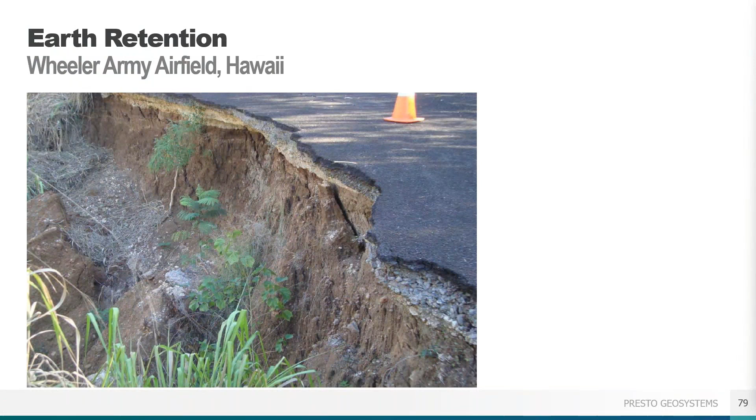They had avalanches. They even had mudflows. So it was just terrible, and they had a lot of issues they had to deal with. So the Army Corps got involved, and they went out with a design-build project. The initial design was basically cast-in-place concrete walls on micropiles.

Then they got a shotcrete wall with another concrete drive slab. They had drilled shafts, steel H beams, precast concrete panels. I mean, you name it. It was a very, very hardy system. But what happened is, once again, they went to bid, and the costs were significant. One of the biggest reasons was because of difficult site access.

It was hard to get the construction equipment and the equipment needed to install the steel H beams, the shafts, all that. It was very expensive to get it up there, and almost impossible. So the winning design team approached us, along with the engineer, and they had done a bunch of GEOWEB walls before, so they brought that as an advantage. So we worked with them.

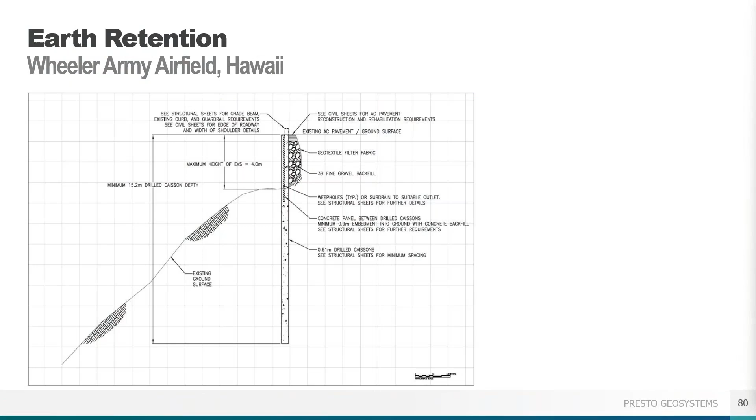And basically, the biggest one was easy construction and being able to get the equipment into the site to work on it. So whenever we're doing designs, we're going to make sure we look at groundwater, whether there's dry season, wet season. We want to make sure that there's no indication of deep-seated failures. We're going to use soil values if we have them available.

Most of the time, as people that design walls, you're really sort of guessing at these walls. We didn't have geotech information available on this, so we assumed some conservative values here. Because it was an MSE wall, we had to design the geogrid tieback. And for any geogrid wall, we follow FHWA requirements that usually it's about 70% of the wall height and embedment depth. That's sort of a rule of thumb that most engineers use to design reinforced or MSE walls.

And then as you fill it, you just pull these stretcher frames and go on to the next system. Just continue that all the way down the wall. It's very easy to install. That's why a lot of these walls are just built by landscape contractors. It doesn't have to be a general contractor. It can, but it doesn't have to be, because it's really not that difficult to install them.

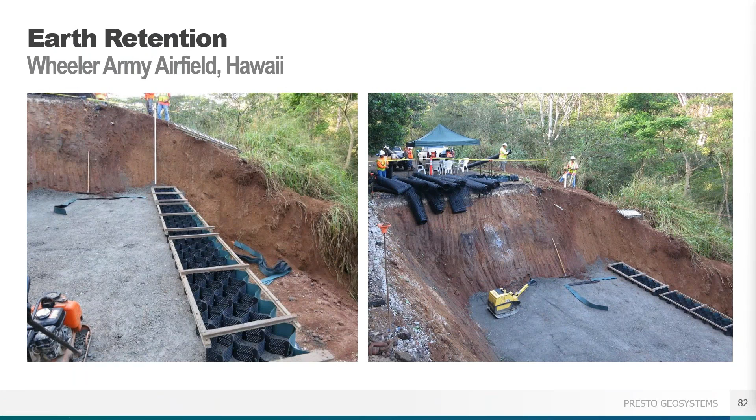The good thing here too is we can fill the front fascia with topsoil and have a vegetated wall. We can fill it with aggregate. We can fill it with concrete if it's along a river bank or a stream bank that's going to see excessive flows. This one, they actually used a 50-50 topsoil aggregate blend. They knew how much grass grows in Hawaii, and they wanted to provide some structure to it.

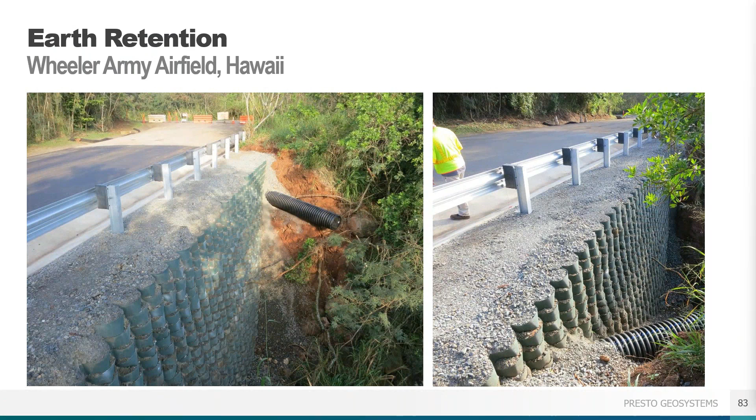Here you can see the finished wall. Not a problem with any type of penetrations. We had some sonotubes that went down below this wall, so there's no problems with any pipe penetrations. You just cut it to allow the sonotubes for installation.

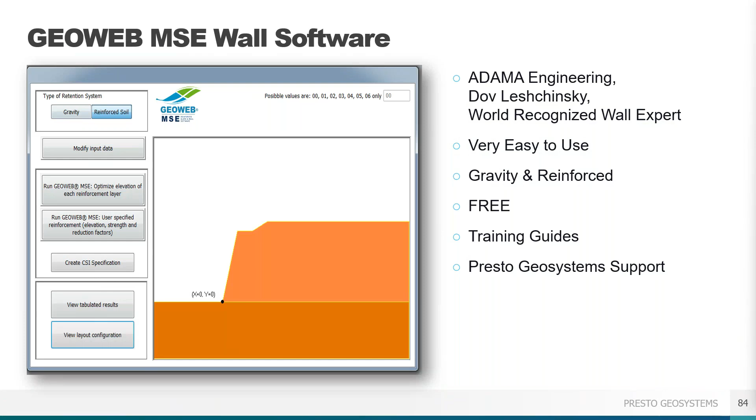They can use those programs more in depth. So this, like I said, this is for free. If you're interested in a copy, you can go to our website at prestogeo.com, and under the design tab, you can request a license, or you can just contact us. You can send me an email. I'll show you that, we're coming up soon, a couple more slides. You can reach out to me and I can send you the software.

It comes on an annual basis. So I'll send you a password and the software. At the end of the year, I have to send new copies out because we upgrade the software every year. So the password remains the same unless you get a new computer, but I need to send you a new copy.

So in summary, same flexible system. We can do reinforced slopes. We can do gravity walls. We can do reinforced walls. We can fill that front cell with topsoil and vegetate it. We can do aggregate, concrete. We have that free software.

Once again, we're going to give you a free complete solution. It's going to be a written summary. We're going to run the MSEW for you. We're going to get the full design. It'll show you the geogrid strength, the uniaxial geogrid strength that you need to basically stabilize these walls.

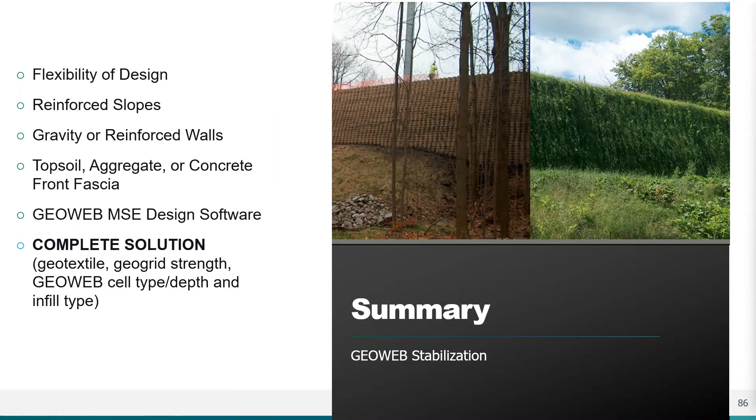So we recognize that every project is unique. It really does depend. It needs a unique, specific site evaluation. So we'll make sure that we work with you. And as I mentioned earlier, I know we're not going to be the right system for every single project.

We're going to hook you up with our local distribution network. They're not only versed in GeoWeb, but also in geosynthetic solutions. So we'll let you know right away if GeoWeb is a good solution, or we have to send you over to our distributor, and then we can work with other manufacturers and get a more cost-effective solution.